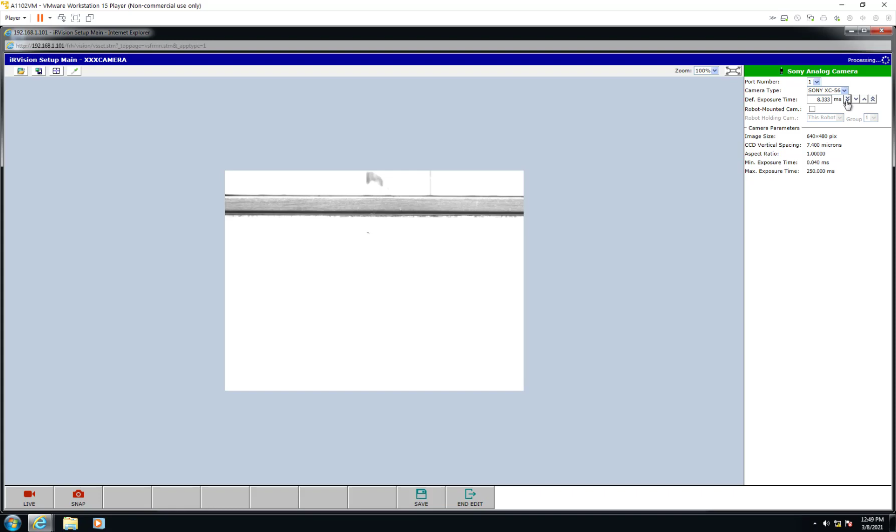Initially you'll see probably just nothing, all white. What this really is, a camera setup, is to make sure you're communicating correctly with the camera and to make sure that you can actually use this camera setup regarding its focal length, field of view, and lighting that's available. So I look at this and I know that it's too bright, so I'm going to knock it down a couple of stops, and I notice this is a good setup, and I've worked on this, so it looks very much in focus as well. So these are the kind of things that you'll see in the camera setup.

I'll save this and then end this edit, and that's really all there is to do in a camera setup.

I'm going to pull up the lab we have here, the inspection lab, to help follow along. We'll need this documentation to know what we're doing.

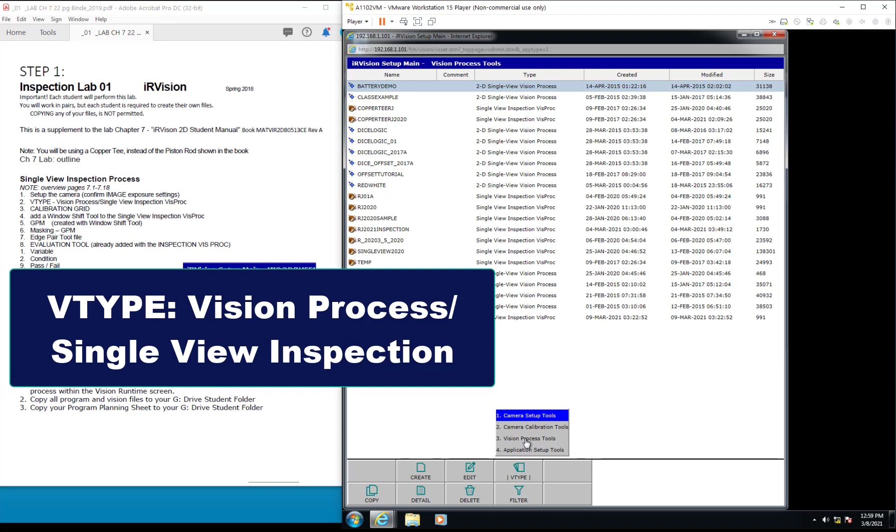So the next thing we're going to do, if you remember we were in V-Type camera setup, is get out of that and go into the process tools. Within it, we're going to look for an inspection process. So that's what we're doing now, building out the inspection now that we've set up the camera. So this is process tools, create.

Within it, we don't really want the vision process yet - that's for creating offsets. What we want is the inspection vision process, single view inspection process.

Again, you're going to use your three initials and call it Copper Tee, and add a comment - again I'm going to put 2021 just so I know what it is, and I'll click OK.

File is already in use. I'll call this underscore.

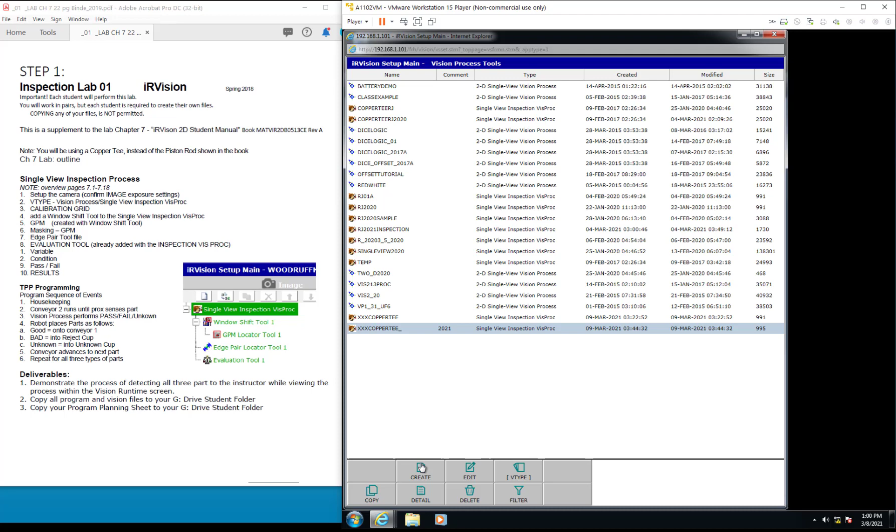Okay, and Copper Tee 2021 is this right here. I can either select it like I have right now and click edit, or I can double click on it. Once I do that, I see that there's a part of a process already built out.

I've got the evaluation tool, which is always going to be something that allows it to pass or fail. Clicking on the tree that we have here, we have a way of building out different processes, and we're going to build it out to look just like we have here. That's our first goal, to actually set that up so that this looks just like this.

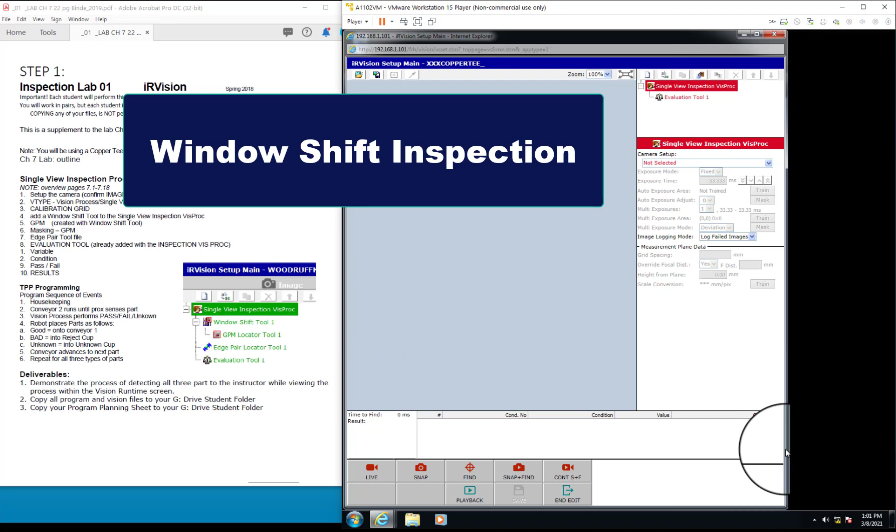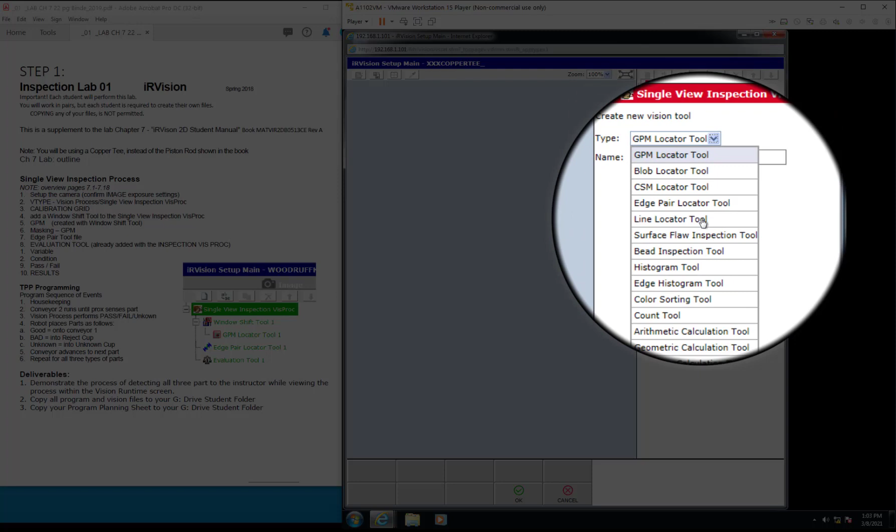I begin doing that by being sure I'm clicking at the very top of the tree, and I go to this section right here, which will be a new process. I click on it, and even though I have a GPM locator here, I don't want to select that right now. In fact, I want to select the Window Shift tool, which is right here.

And then I click OK. You notice that the Window Shift tool builds in a GPM locator, a geometric pattern matching locator tool, placed within the Window Shift tool. The Window Shift tool allows other tools to use this GPM. It's a little confusing, but just think of it as a way of allowing this GPM to be shared by other tools that you're building in the tree.

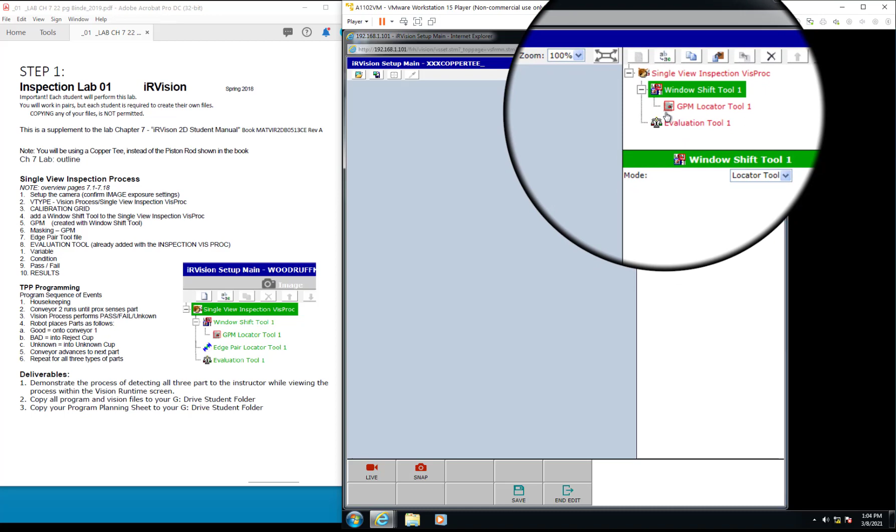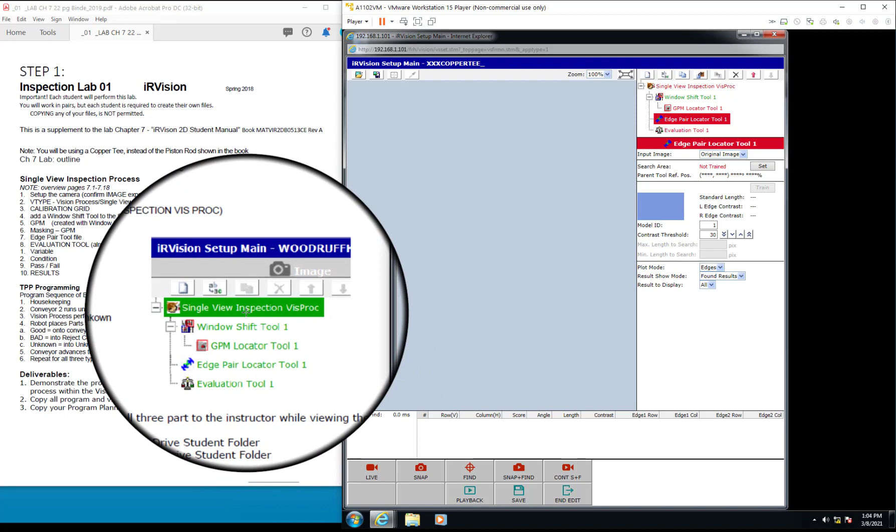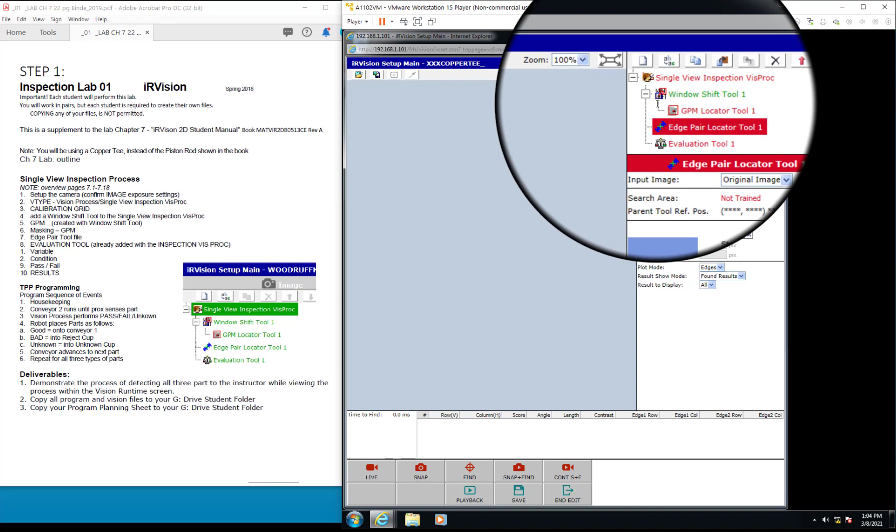And then we'll move on to do the Edge Pair Locator. So again, we have to go up to the top of the tree, select Edge Pair Locator right here, and OK. Notice now I have the same exact structure listed in your lab documentation: the single view inspection, the window shift tool, and then the GPM locator underneath it within the window shift tool. Then we bounce back to this main branch, and we have the edge pair locator tool and the evaluation tool. One of the problems you'll come into is by possibly putting these tools under the window shift tool, or just not having the right subdirectory layout like is shown here.

Okay, our goal now is to make this red screen green. Basically, this is red because it's not finished. When it's finished, everything will be in green. There's nothing to do for the window shift tool - that's why it's in green already, it's completed. So if we look at this, we have to select a camera setup.

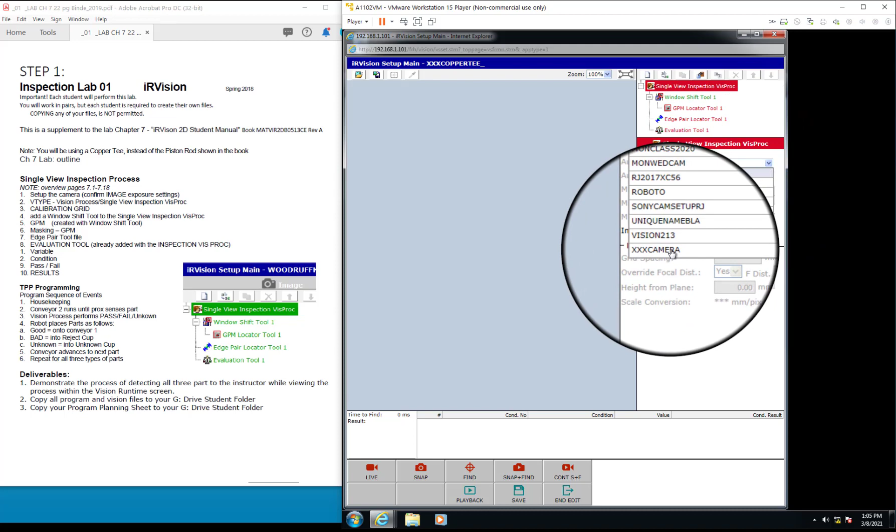Well, we just did that, and I'm going to go over here and select our camera. You notice that suddenly we get some more green here, and this is my camera setup. Now everything that I do for this camera setup actually is saved - it's not just to test it out, it's actually to save these settings.

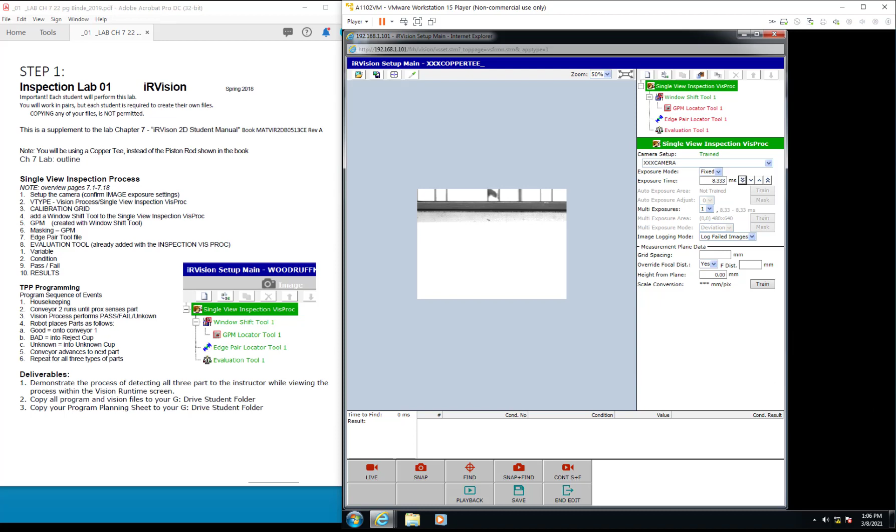And I know that I'm too bright now, and I'm going to click down a few stops to actually lock in. But this is where I'll probably need my actual target, my product going by, to actually get a good feel for whether I have the correct exposure. To do that, I'm going to click the live view here, and then I'll place my copper Tee in the correct orientation just below the camera, again in a horizontal way where I like to measure the actual inspection.

Once I've done so, I want to make sure of a couple of things. One is contrast and focus, and a few other things too, but I want to make sure I have enough contrast, which I've set this background up to be very bright because I know I'm dealing with a dark target. My product is much darker - on the scale of, there's really a scale of 0 to 255 with an 8-bit camera like we have, 0 being completely black, 255 being pure white. This copper Tee definitely leans more toward the darker side.

So I'm looking for a white background. I'm using a pretty bright background, not actually white. This is a black and white camera - this image back here is actually yellow, but it's appearing as mostly white, giving me the contrast. So I've got nearly 255 background and a pretty dark target. This will give me edges that I can work with.

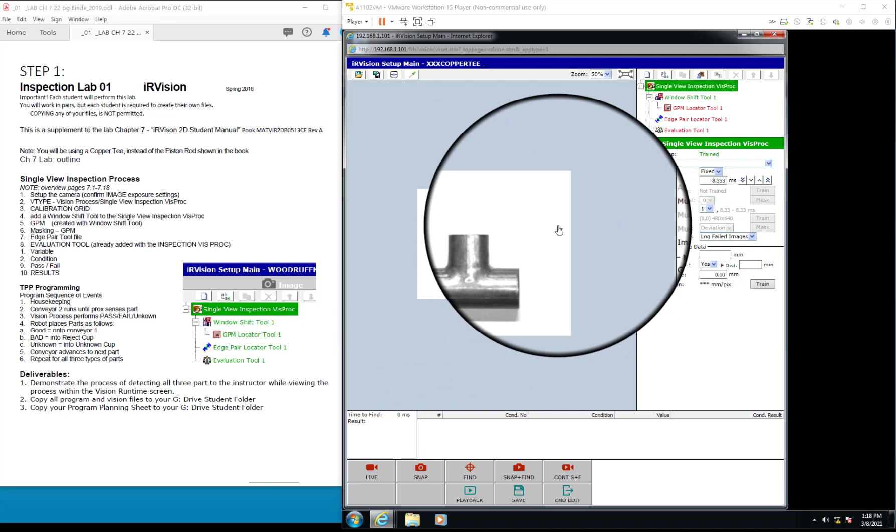Second is my lighting. My lighting is what's made this so bright back here and yet not bleached out my target. I wanted to brighten up the background, but I wanted to leave my target still pretty dark. I do have some issues with some reflections on the target, and that may be an issue, but I think I'll be able to get by with it because I could see there's enough contrast between my edges.

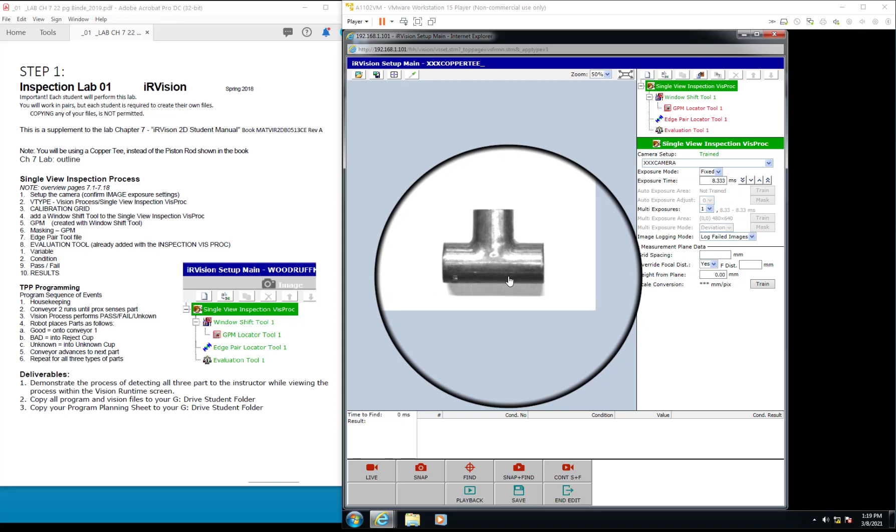Third is a shadow that I've created with my lighting. My lighting is obviously coming from this top direction toward this direction, but that won't be an issue because I'm not measuring from here to here - I'm measuring across the long side of the T. So that shouldn't be an issue, even though I've created this shadow over here, which it's pretty hard to get away from shadows. Unfortunately there's tricks to do that - we'll talk more about that during lighting setup. But for the most part, I'm liking this setup.

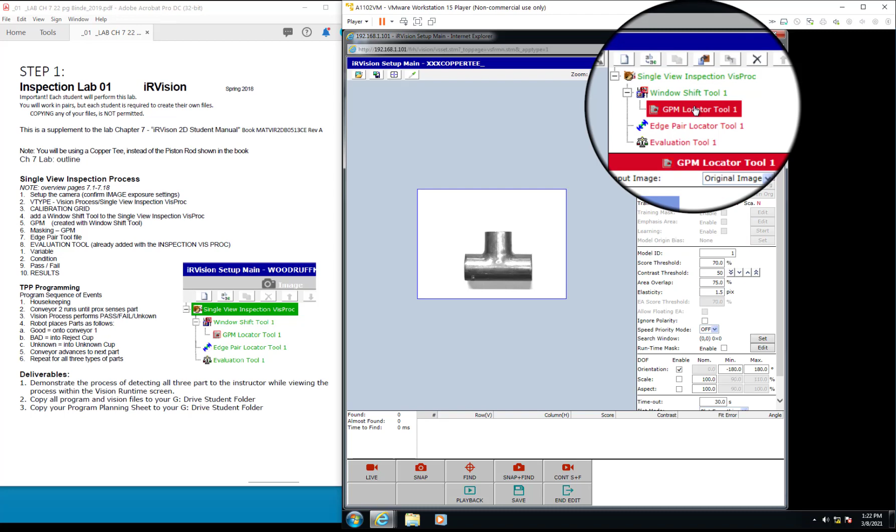The building structure for just about any iRVision plane inspection or offset is going to be a good GPM, a geometric pattern match, and that's the next thing we'll actually build out here. So I'm going to double click on the GPM locator tool, and you'll notice that there's a whole subset of tools here that we're about to go through, the first of which is I want to teach a geometric pattern match.

When I do that, I'm going to get a window that wants to inspect. I'm going to set that up around this, basically setting up my standard for what I'll be looking for when I do a vision inspection. This better be a good T, in other words. I don't want a T that's too large, too big, or deformed. I want what is like the gold standard of my product in here.

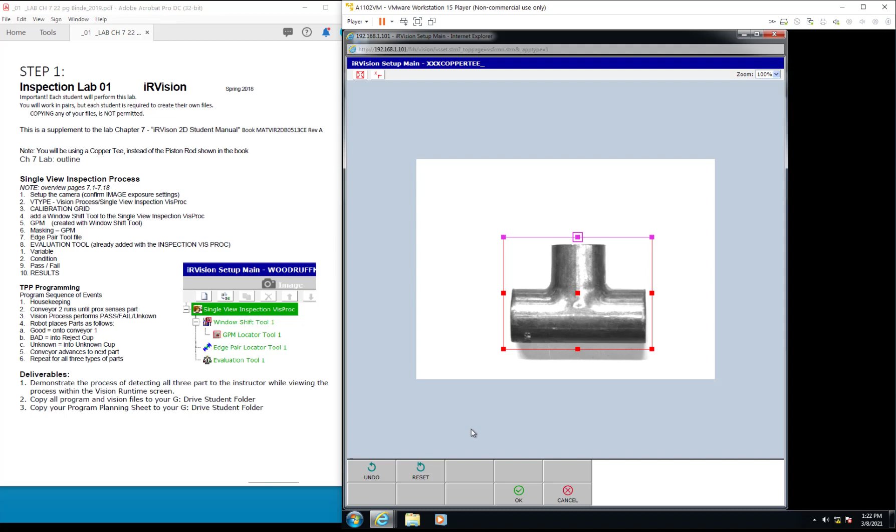I've selected this window and clicked OK, and you notice I've got quite a bit of the green outline here. Let me pull this over a little and expand. If you can see, there's a green outline showing where it's found edges, but it's also found them within my product here.

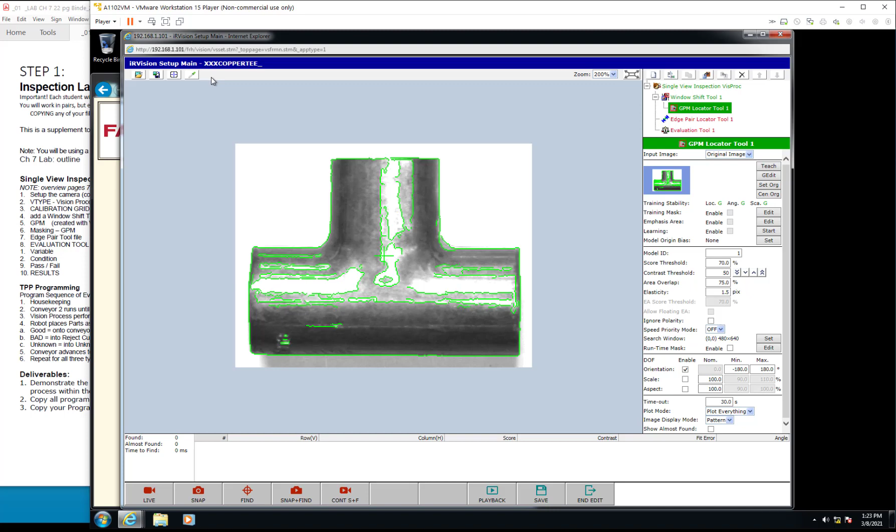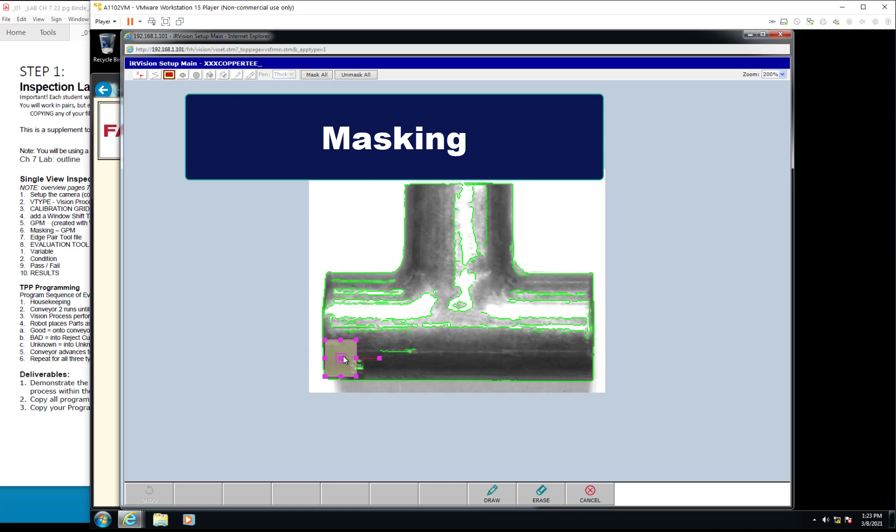So I really want to get rid of those, and that's what we're going to do next, actually mask those out. We're going to create a training mask, and I'm going to click on this right here, then select some drawing tools to actually create a mask. A mask just means ignore these areas of my master, the pattern I'm teaching.

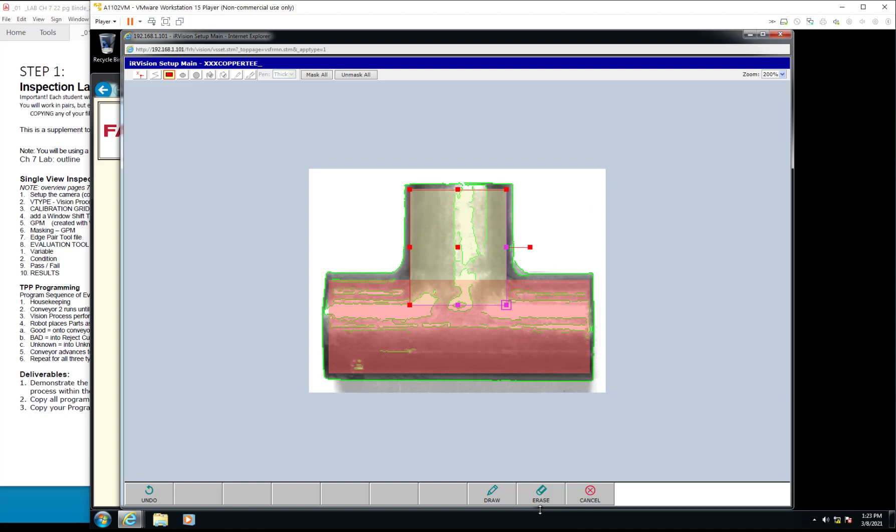Ignore these areas - I don't really care about the inside of the T. All I care about is clicking draw, and I like using the box tool for a rectangular product like this. So I'm coming down, creating another box tool, and just selecting inside the edges. Again, click draw, click OK, and now you see I've masked out all that information. So now when the iRVision process recognizes this T, it's going to ignore all the areas I've shaded out with this mask before it begins processing.

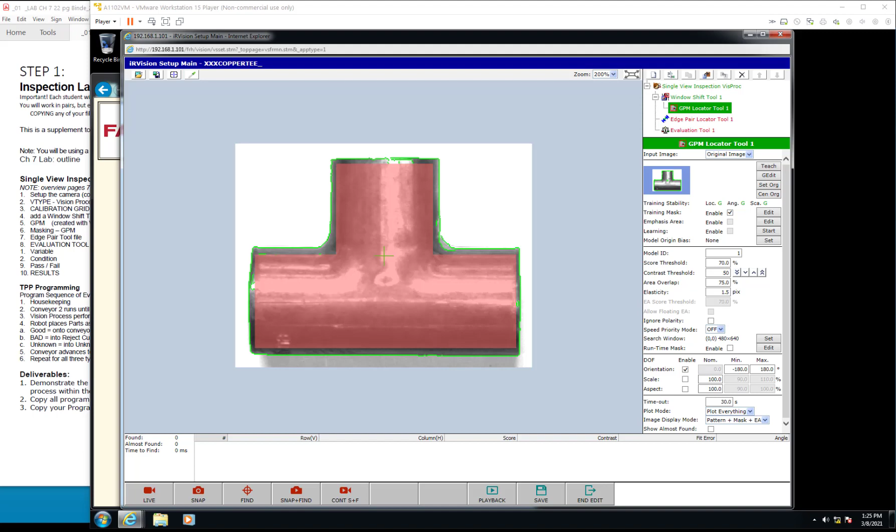By this time we've done a bit of work here. We notice we're pretty far along in making all this green. If I look now, the edge pair tool is probably the next thing to work on, but this is probably a really good time to save. Keep in mind, if somebody shut off your robot controller, you'd lose all the information you've done up to this point if you haven't saved.

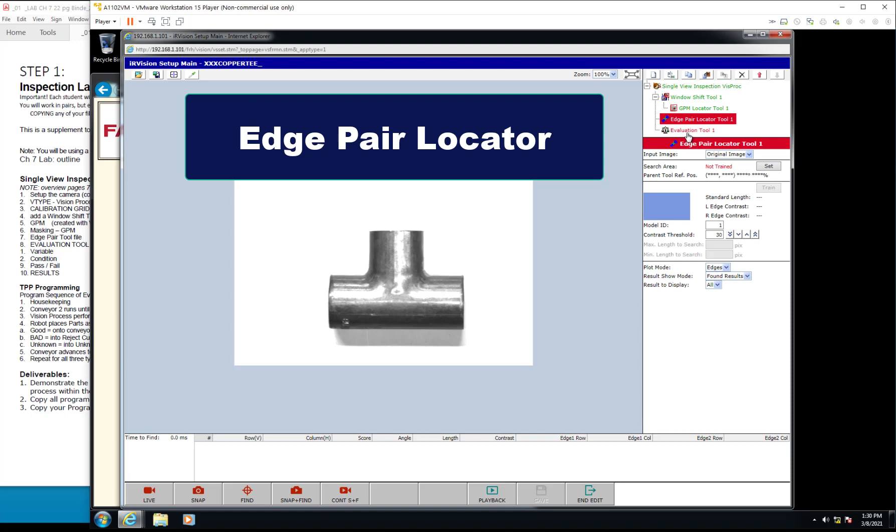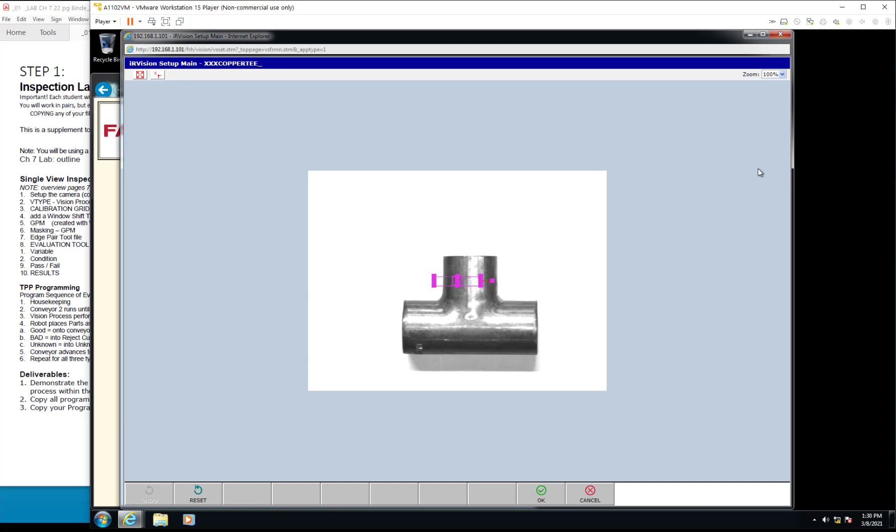Okay, so let's set up the edge pair locator tool. To do so, you must have it selected - it can't be selected somewhere else like up here. You have to select the edge pair locator tool, and then you can come down to the search area and set it up. You can see it's red, it's not trained right now. Set it up and drag it along here, across the edges that I want to inspect to determine the length of them.

So I'll say OK, and then I'll save again.

Once I've done that, I want to actually train it. And here I'm looking at the edge to edge that I want to train, and I have two edges over here, so I may not be in the best setup for training this, but I'm going to use this anyway. This is a case where I would want to set the product up so I was actually looking at only two edges here.

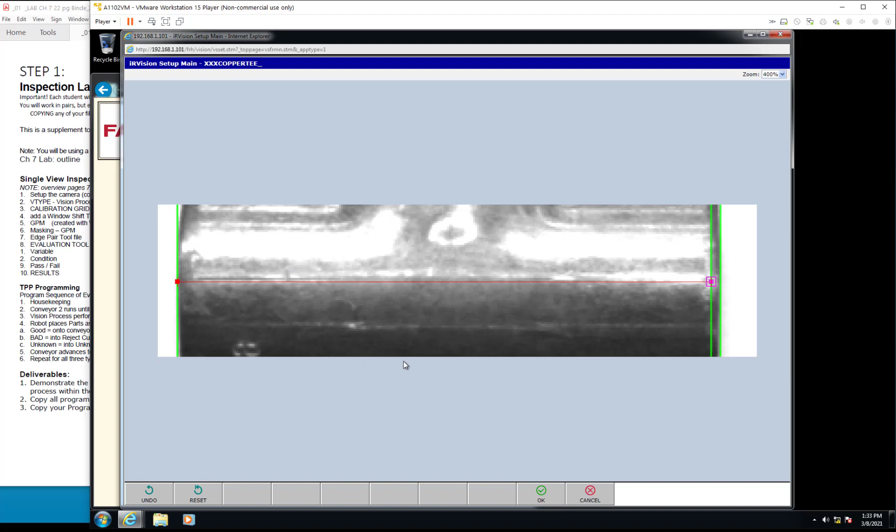What this means is that my T is a little bit too far to the left of the screen. If I shifted it to the right, I wouldn't see the bottom edge. What I'm seeing right here is the top edge, and over here I'm seeing the bottom edge. I definitely want to just measure top to top. I know this is the top over here, and this is the top over here, and I don't want to measure bottom to top, even in a 2D view. And then I'll say OK.

Now I want to introduce some of the snap and find tools down at the bottom right here. Go live just shows the current image, and if we put our hand in there, we'll see it moving. Snap is to grab an image, and find is to actually find some of the tools you've set up. Snap and find does both, and you can set it up to continuously snap and find as well.

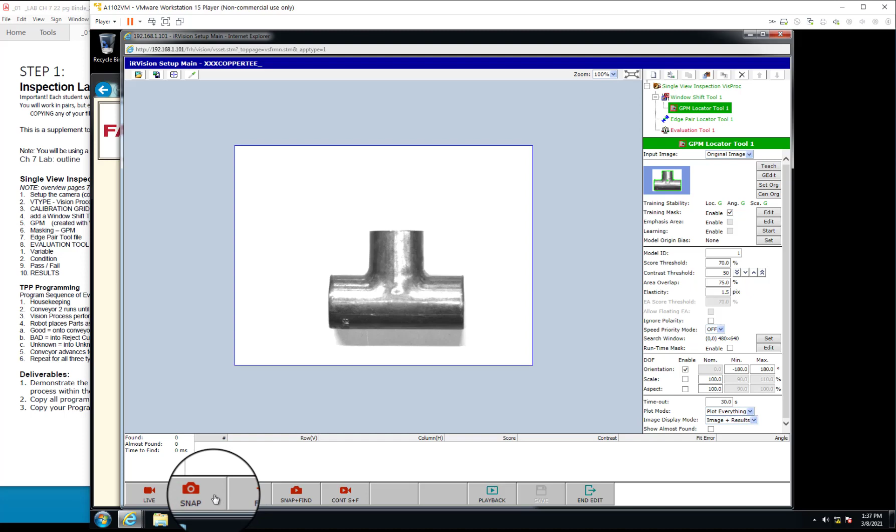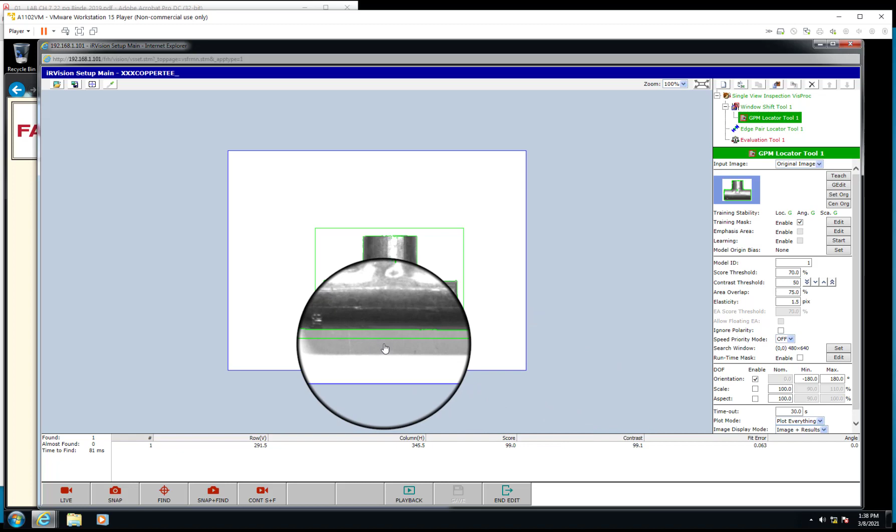Let's go back to our GPM, our geometric pattern match, and do a snap and find on that. The scores show it found something in pixel row 291, column 345, with a score of 99. Well, it better be, it's out of 100, and that's great. The contrast is 99, and the fit error is a small number. The angle is 0 because the GPM was taught at 0 degrees off, so it's basically looking back at the master, which is why it has a score of 99.

Then if we come down to the edge pair tool and do another snap and find, sure enough it found the edges I trained it to find. If I come up to the vision inspection process here and do a snap and find, it'll say evaluation tool not trained. Oh, doggone it, we still have some red down here.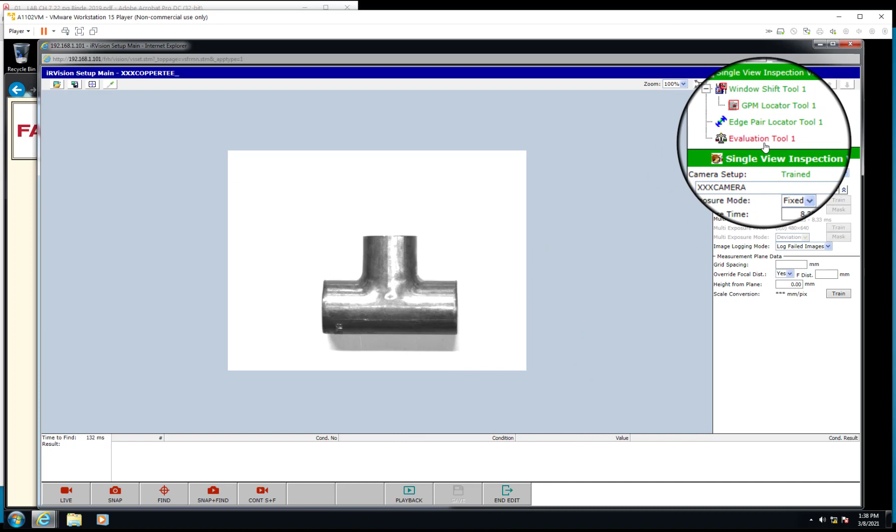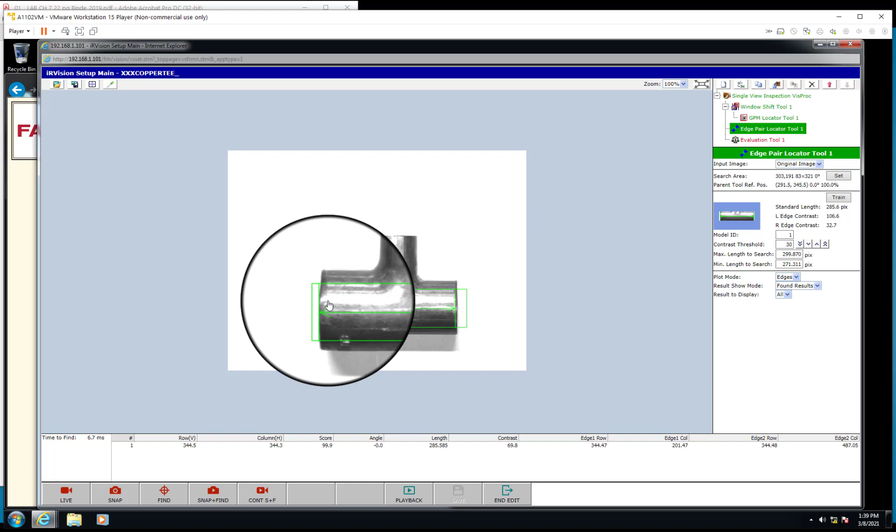But before we can do that, if I go back to this pixel tool and do a snap and find, it tells me the length is 285. Well, all this information isn't calibrated right just yet, it's picking out the pixels. It knows exactly how many pixels it is from here to here, but it hasn't converted that to millimeters. Right now, what does it mean that it's 285 pixels? It doesn't really mean anything.

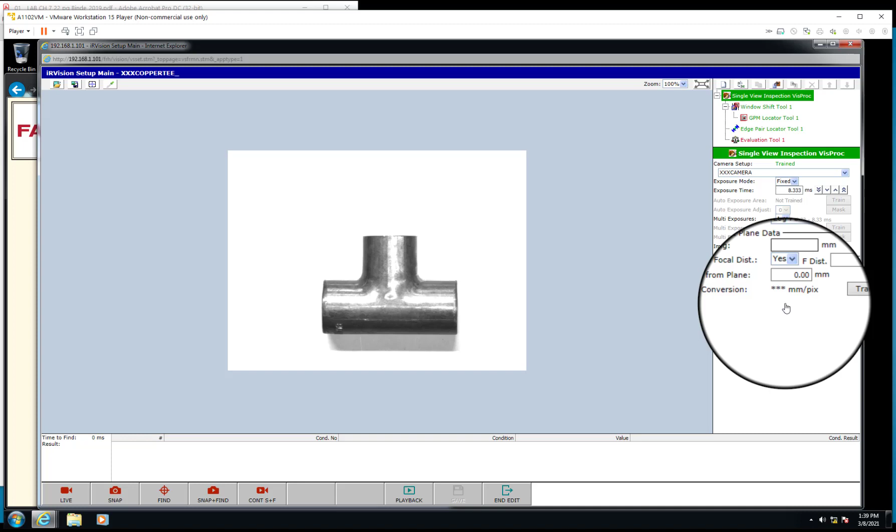First we have to go back and calibrate it, and say how many pixels there are to a millimeter, or vice versa. To do that we have to do a calibration. Below the initial setup with exposure, we try to set up the grid spacing, override the focal distance of the lens, and the height of the product from the plane it's inspecting, to train this and give it some type of grid calibration.

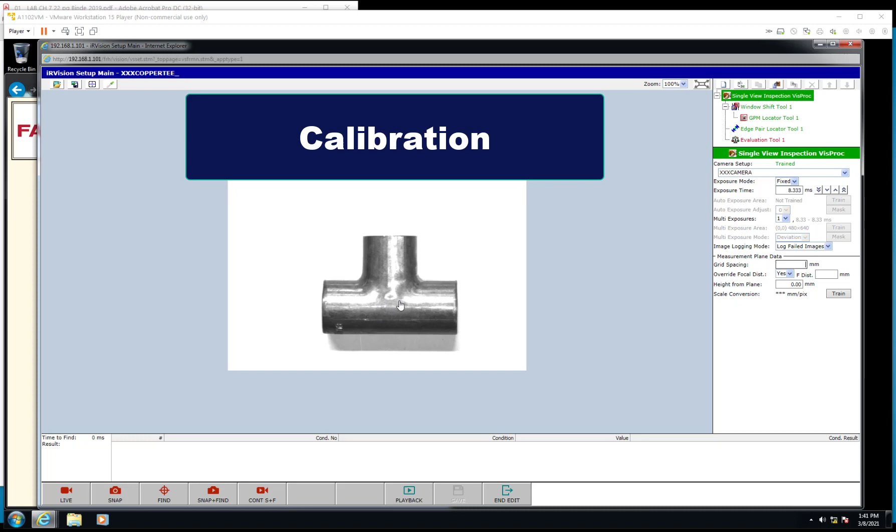So what I'm going to do now is replace, in place of my product, a vision calibration grid that Fanuc produces. Let me do a snap here. I notice it's not in place, so I'm going to have to put this in a better position so that we see the 3 large circles and the 1 large circle pretty much in the center. Moving it over a little bit and in this direction, and it seems like this will be a good place for it to live.

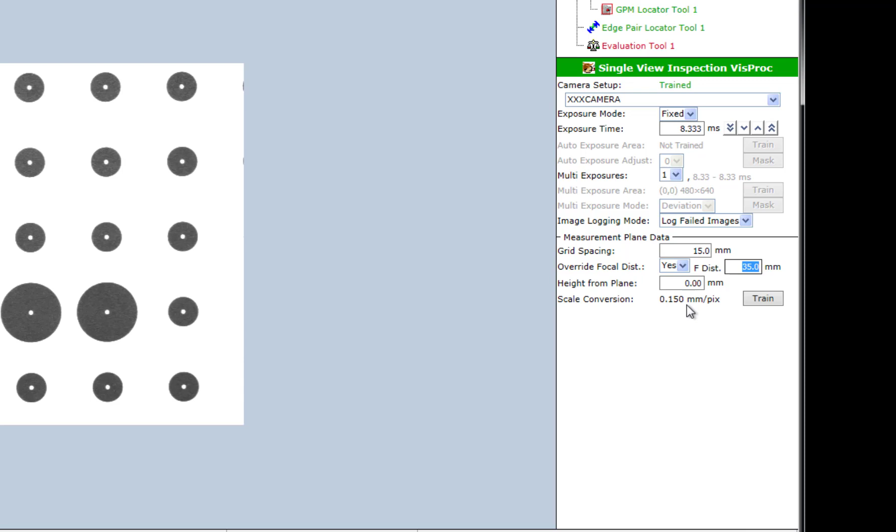I've gone ahead and entered my information here. I'm using a calibration grid that is 15 millimeters on centers from dot to dot, in each direction. Then I'm overriding the focal length, and you have the option to do that or not. I recommend you do it. I know I'm working with a 35 millimeter lens, I've looked at the camera and saw that the focal length is 35 millimeters. Height from plane, I'll leave at 0 for right now, and I'll train this.

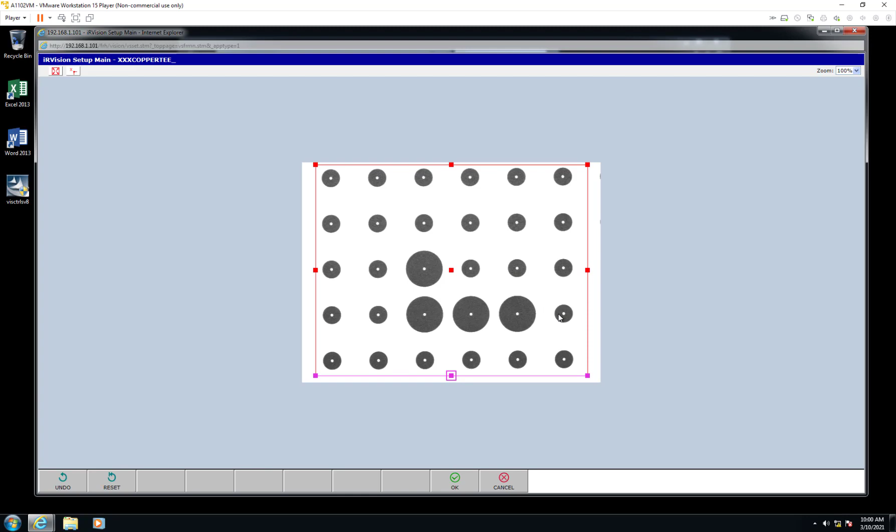I'll say OK, and then yours, since I've already done this once, will be something like this. You'll just have to make sure you're capturing no extra artifacts, and just surround, trying to get a little bit into the white, surrounding all the dots. Don't get partial dots, try and get all the contiguous or full dots that you can using that window.

Once that's done, it's going to say the scaling data has been calculated. I click OK, and I see that my scale conversion is 0.15 millimeters per pixel. What that means is after it looked at the grid and determined they were 15 millimeters apart, it took a snapshot, and the distance each pixel was actually recording was 0.15 millimeters per pixel.

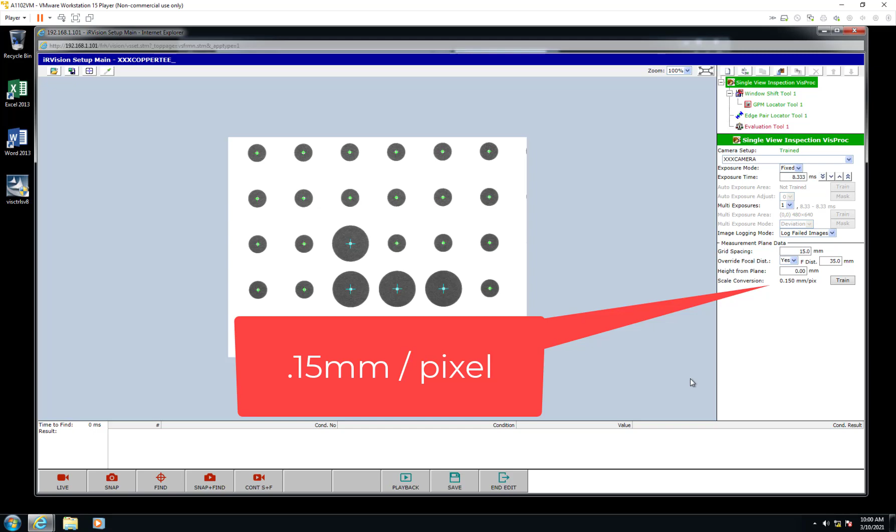Let's try to understand better what that 0.15 millimeters per pixel means. Let's measure from edge to edge of our screen, from the left-hand side to the right-hand side. With mine, I come up with 96.2 millimeters from the left-hand side to the right-hand side.

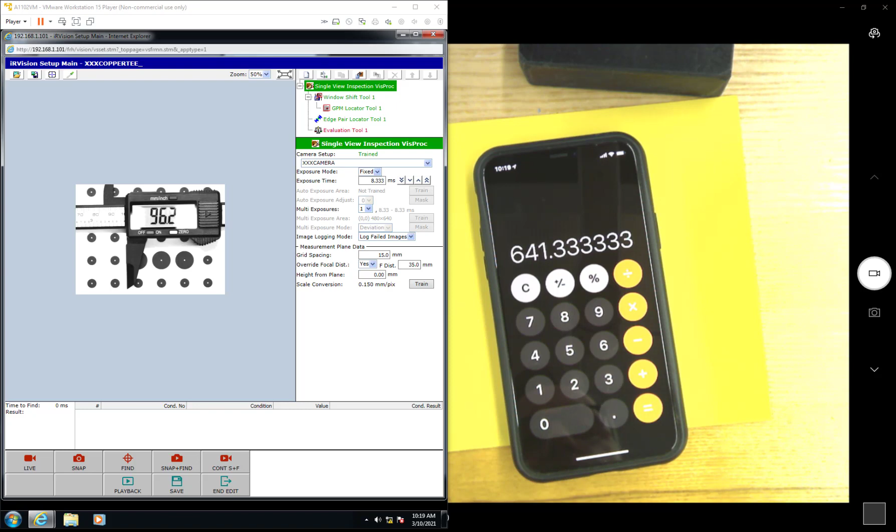Now let's take a calculator, and let's take that 96.2 millimeters and divide it by our rate of 0.15 millimeters per pixel. And I come up with 640 pixels, which is what this camera is. The Sony XC56 is an NTSC camera, which is 640 by 480 pixels, 640 across the X direction. So it looks like a pretty good calibration.

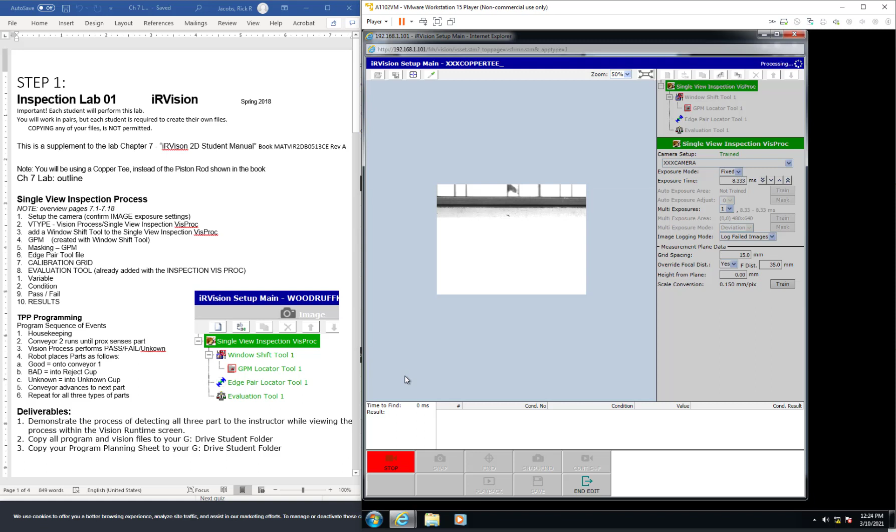Let's remove the calibration grid and reset up our T with the background in similar position to where we taught the master originally. Stop live view. Now let's go back and look at, the only thing we have left is the evaluation tool, but I want to check our edge pair to see if it's actually measuring accurately.

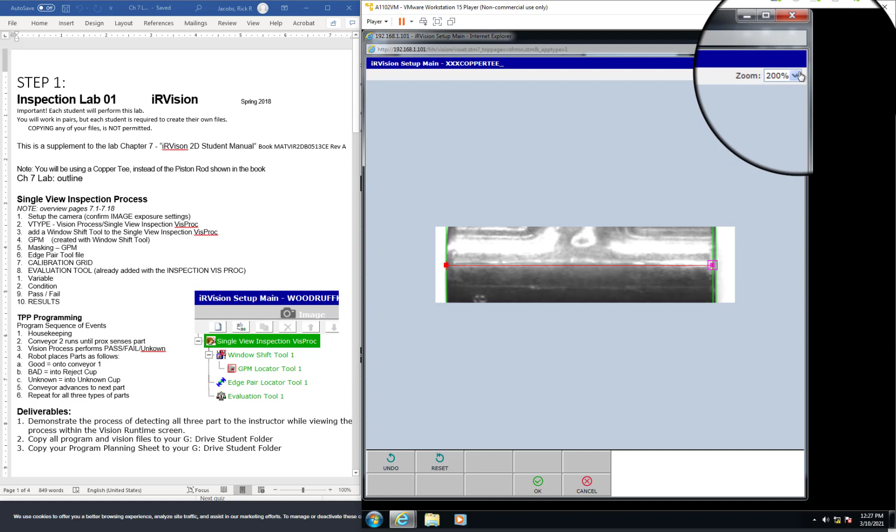You'll see that I've actually set up some values here because I've already trained this. But let me train this again and just show you that I'm going from this edge right here to this edge over here. If I want to zoom in on that to just make sure I'm getting closer to that edge, I can do that, and it's probably a good idea. It looks good there, and looks good there as well. Remember, I'm not measuring to the bottom edge, I'm measuring to the top edge of the T.

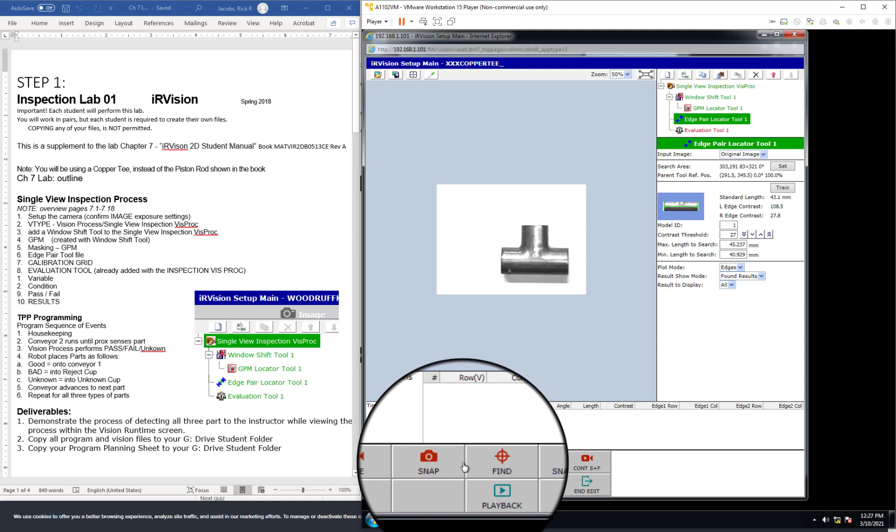I click OK to save that, and now I do a snap and find, and it's measuring, and down here it says it's measuring 43.08 millimeters. If I measure that with my calipers, I see that this actually measures out to be 42.7 millimeters.

So now here's something that's not mentioned in your textbook whatsoever, and that's to adjust your calibration. To do that, I'm going to take those two numbers, that 42.7 and that 43.08, and use a calculator. I'm going to divide my 42.7 by 43.08, and I get, it was pretty accurate. It's 99.11% accurate. But what can we do to make that actually more accurate?

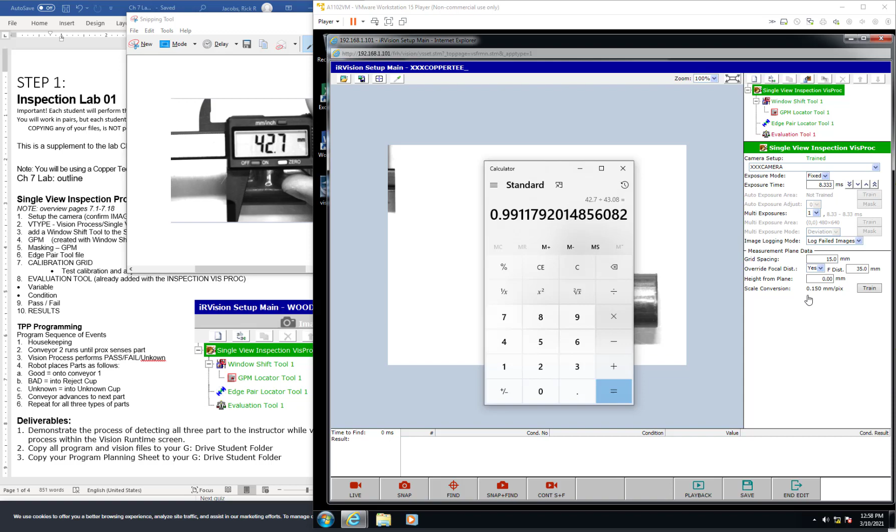Well, I can look at this 0.150 millimeters per pixel and say, I want to really make that times 0.15 millimeters per pixel. I really want to make that 0.1486. So how do I go about doing that? Well, I'll adjust the height from plane, because actually the calibration grid that we used was below where we're actually measuring. And that's what we skipped over earlier. We just left this at 0, and we need to adjust for that now.

So what we're measuring to right here is actually closer to the camera than our calibration grid. So let's add the 17 millimeters, which is the height from the top of the T to the bottom where the calibration grid was. Let's add that 17 millimeters and just hit enter. Don't retrain, because that'll ask for a calibration grid. So I hit enter, and it says the scaling data has been recalculated.

Great, let's click OK. Now let's go back to our edge pair tool, do a snap find, and that did too much correction. Now instead of 43.08, we're measuring 42.06. Remember, we want to get to 42.7. So that was a full millimeter off by putting in 17.

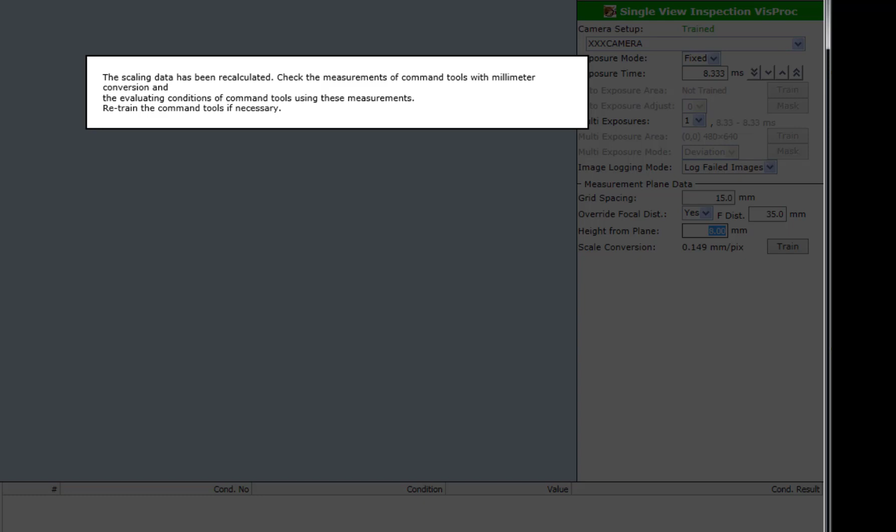Let's go back to our calibration grid here, and let's put in say something less than half, even like about 8 millimeters, and hit enter. Click OK. It recalculated the millimeters per pixel to be now 0.149. Let's go back to the edge pair tool and do a snap find. Now we're pretty close: 42.615. That is like 99.99% accurate.

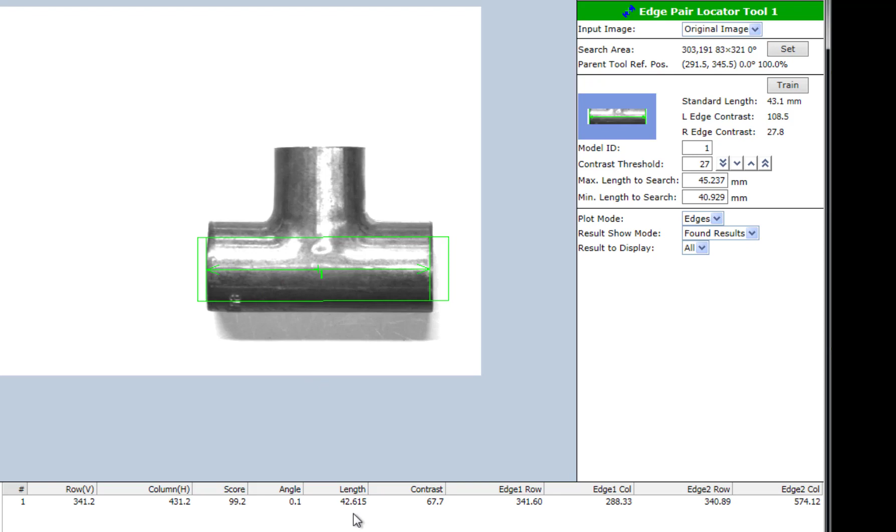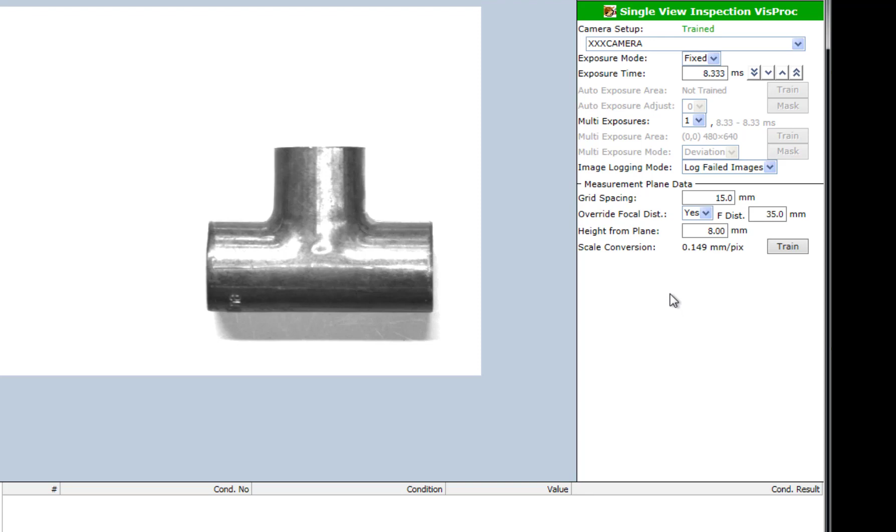I'm going to save this because I like it. So basically what I did there was find the percentage difference between my actual measurement and what I was getting as a measurement here, divide that into my actual measurement, and come up with a correction factor, and multiply that times this scale conversion, the millimeters per pixel, to make this more or less depending on what our measurement was. I did that by adjusting my height from plane to correct this scale conversion factor.